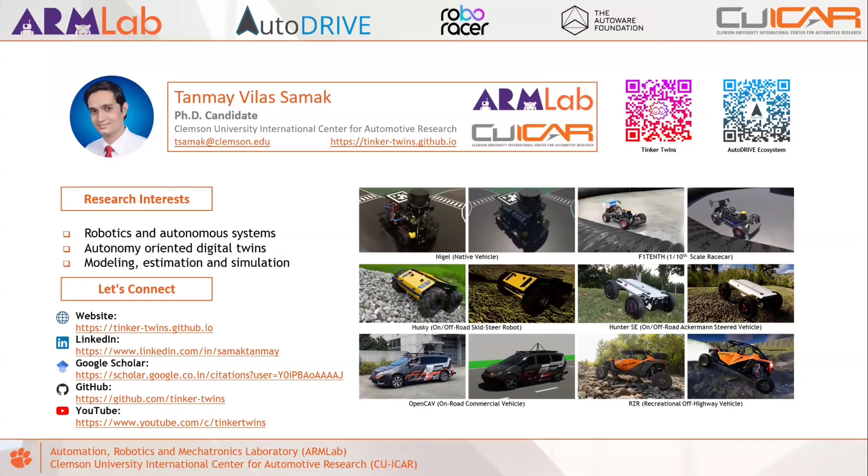Our PhD research is targeting digital twins, no pun intended, where I am focusing on the real-to-sim aspect: whatever is in the real world, how do you model it, estimate it, and then bring it into simulation reliably? Chinmay is working on the other side of the coin, ensuring whatever works in simulation can be transferred with guarantees back to the real world.

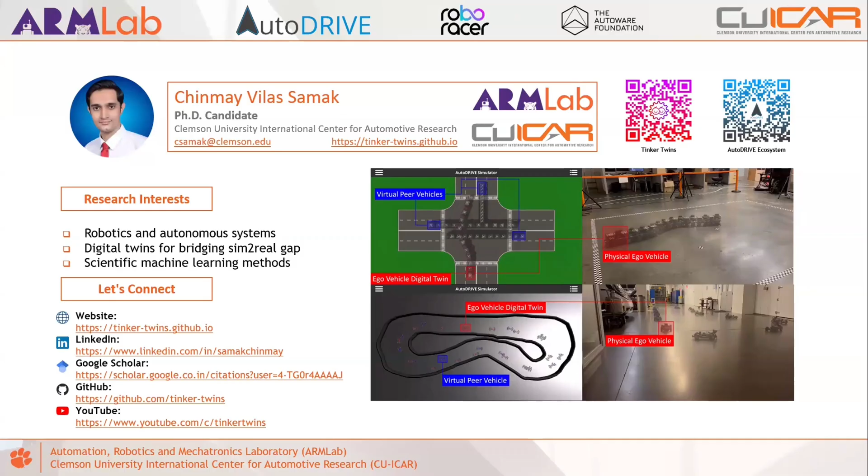In today's agenda, we'll first go over the introduction of what the AutoDrive ecosystem is and how it enables research and education. We'll then talk about some exciting competitions realized by AutoDrive. Most of the talking today will be about AutoDrive-Autoware integration, where we'll highlight some key aspects and demos that we have curated. Followed by that, we'll have a step-by-step tutorial on how you can get started with AutoDrive and Autoware today. And then at the end, we have some exciting unveiling to do, which I won't talk about now, to save the fun for the last.

So let's first get into what the AutoDrive ecosystem is. For those who don't know, we have been developing this digital twinning ecosystem for a few years now. It started as our research internship at Nanyang Technological University, then continued as our senior design project in undergrad, and after we joined directly to pursue our PhD at CUICAR, this is something we have been developing further.

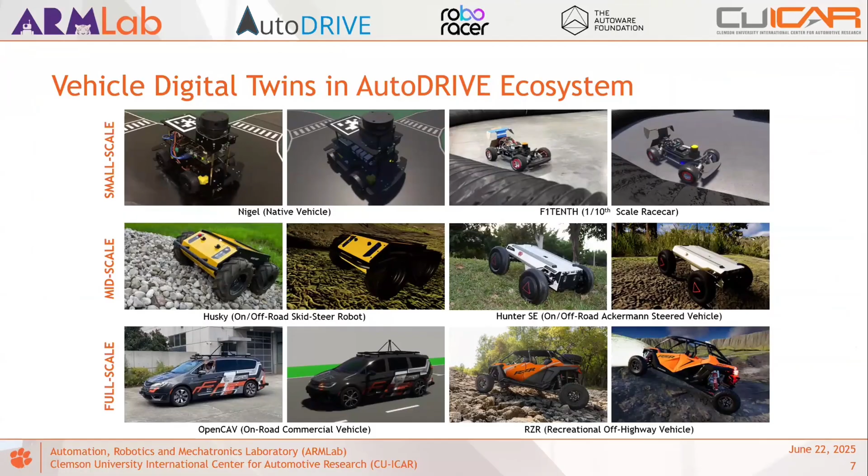So here is a glimpse of, or a zoomed in version of, the different digital twins that AutoDrive supports. And here you can see them in action, where you have the different scales of vehicle dynamics being simulated differently for each vehicle.

For example, small scale vehicles generally have very basic powertrain components, a motor connected by some gears directly to the wheels. But as you go towards full scale vehicles, you have very detailed powertrains. The same applies to other aspects of vehicle dynamics like the suspension geometry and things as such.

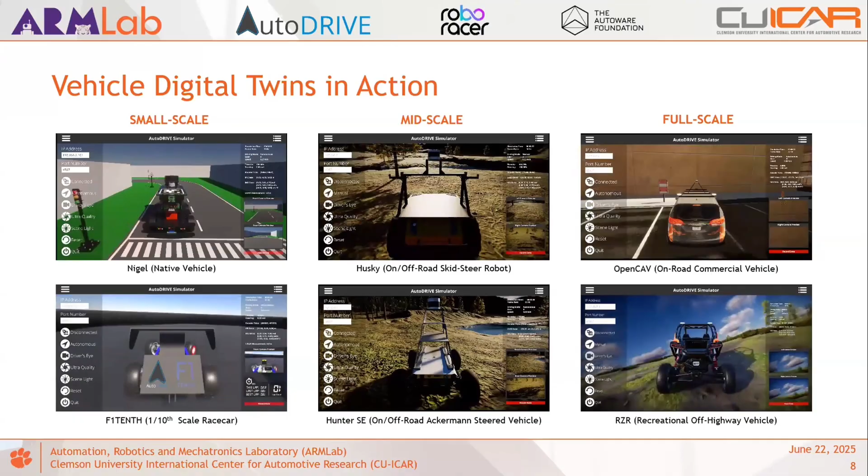Apart from that, the sensor suite also changes. So on the smaller scale vehicles, you have sensors that are typically hobby grade or general purpose academic grade sensors. But as you move to mid scale robots, you now have a mix of both hobby grade sensors as well as industry grade sensors. Typically, when you translate to full scale vehicles, you now have the complete sensor suite comprised of industrial grade components. And these now have been replicated to the digital twins so that the development of algorithms can be targeted accordingly.

Coming to environment digital twins, again, here is a zoomed in version of the different environments that I just discussed. So we have different synthetically constructed environments for small scale vehicles, typically like boxes or vinyl stickers, or in the case of F1TENTH or RoboRacer racetracks, the air ducts.

One of the environments, the tiny town, is something that we have kept for benchmarking across different scales. It is basically the scaled up or down version of the same environment across the different scales that you see. Apart from that, you have different mid-scale as well as full-scale environments. Full-scale environments are typically more diverse in terms of their features so that users can target different styles of autonomous driving or different applications of autonomous driving in general.

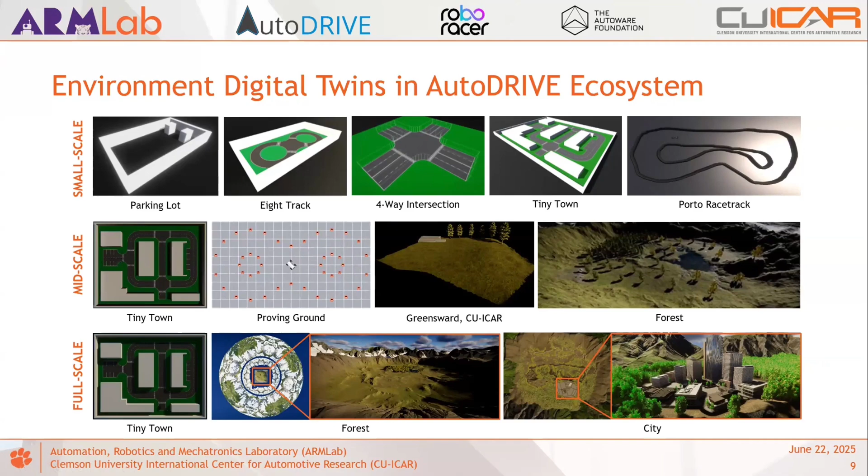But static environments are themselves not enough. So we have, of course, the option of introducing variability in terms of dynamically changing the times of the day, the weather conditions, or other aspects of the scenario.

What you see on the right video is basically a test matrix that procedurally generates and simulates different times of the day. So the top two rows here are going from dawn to dusk to midnight. And the bottom two rows are showing the different procedurally generated weather effects, from clear skies to overcast, foggy weather, rain, as well as snowfall.

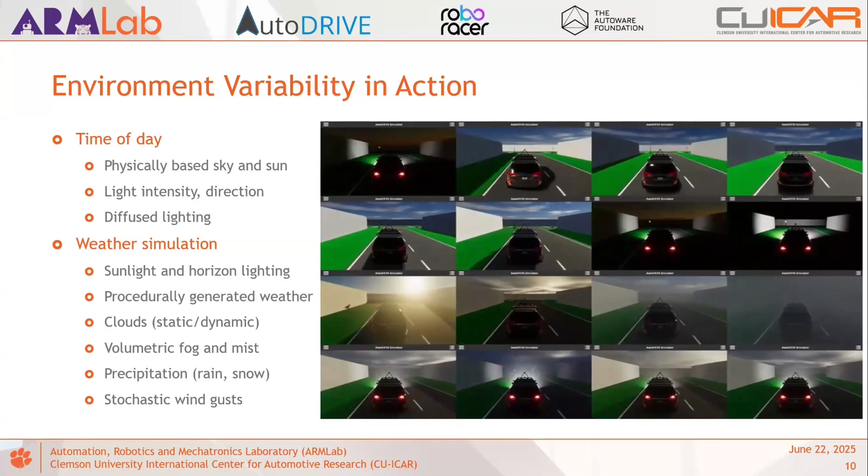But simulating alone is not sufficient. So you, of course, have the most critical aspect of connecting the digital twin ecosystem with a development framework. And that's what the APIs and HMIs are for.

APIs are typically targeted towards autonomous driving applications, where, as you see, we have a different suite of APIs that we support. These will be primarily used for developing the autonomous driving algorithms and interfacing them in real time with the simulator. HMIs are primarily targeted for human in the loop testing and development.

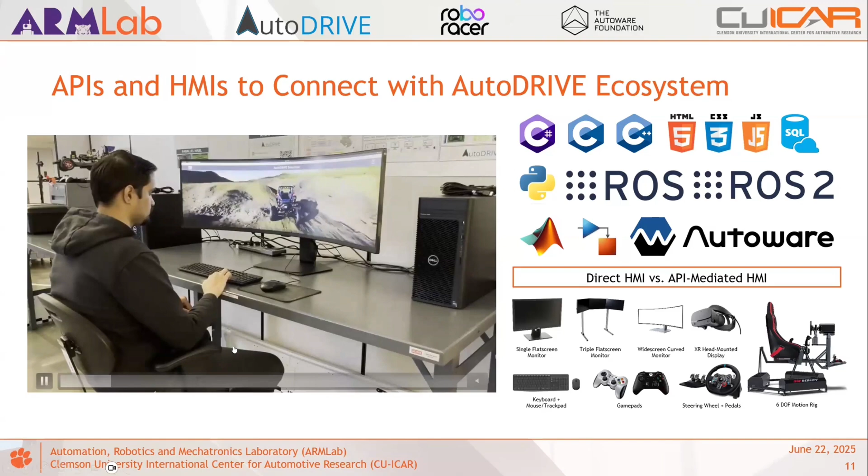And this can be now mixed and matched as well, so as to create a mix of autonomous driving and manually driving aided scenarios, where you have mixed traffic participants, enabling research or development in those operational design domains.

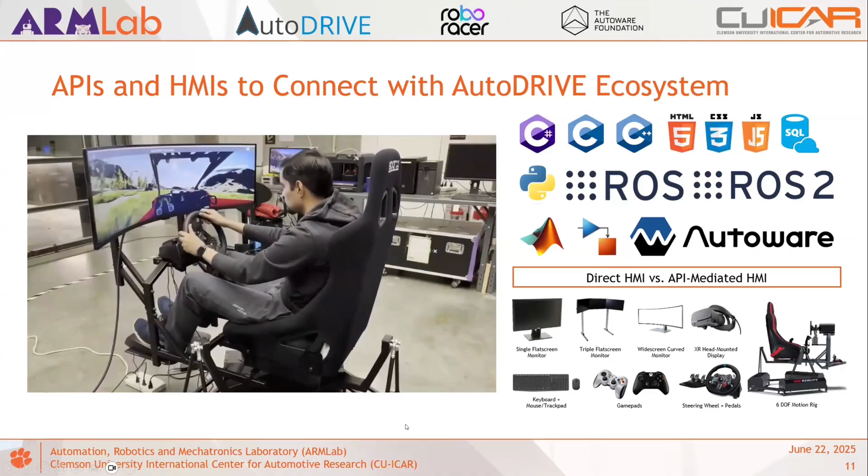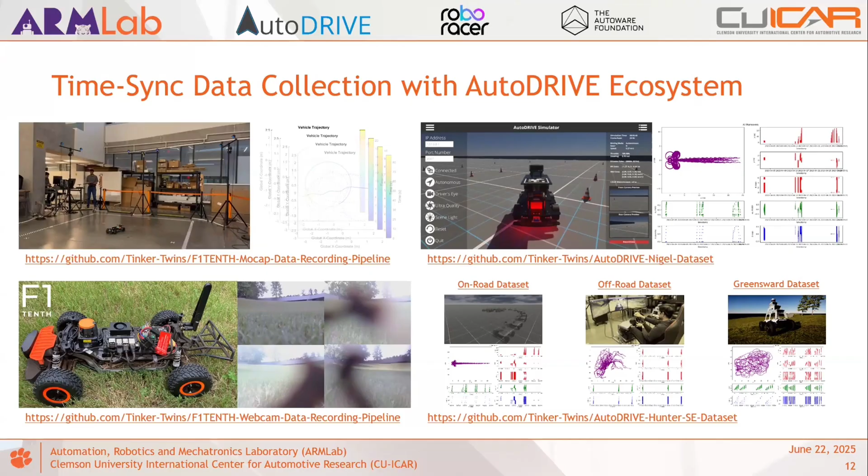Apart from that, we have also released a few data sets using the AutoDrive ecosystem. These are both from the real world as well as the digital twin of the same vehicles. The one thing I would like to highlight here is that all of these have been time synchronized from a data generation perspective, so that not only perception data, but the dynamics data of the vehicles is also usable, and could lead to, say, for example, deriving surrogate models for different motion planning applications or even control synthesis.

One of the key aspects of digital twins is being able to accelerate them, and that's what is supported through the HPC ready simulation infrastructure, where we have different ways of parallelization.

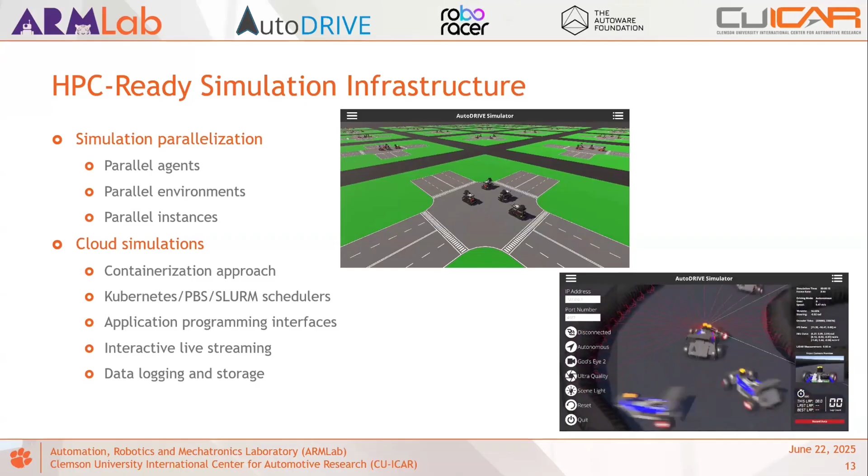Some of them are, as you see, agent parallelization and environment parallelization, where, for example, you could parallelize different environments or agents and isolate them from each other, and then scale those deployments. But apart from that, you also have instance parallelization, where you could spawn multiple instances of the simulation itself, which typically isolates the different variables and vehicle dynamics aspects.

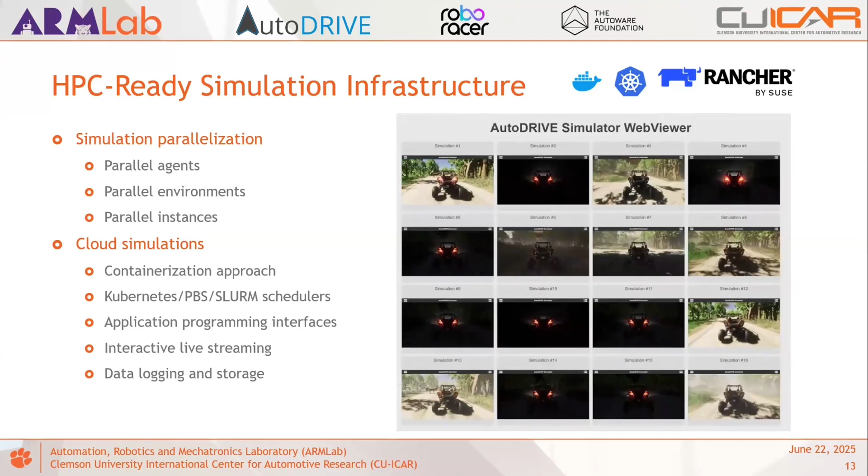These could be done in different ways. Here, for example, we have one of the works where we used Docker containers and Kubernetes orchestration using the Rancher cluster to orchestrate parallelized simulation workloads within cloud infrastructure. Here is another representative use case where instead of using Rancher, we adopted our university's Palmetto cluster.

Coming back to digital twins, here we are showing how one could use the AutoDrive ecosystem to immerse physical full-scale vehicles in the loop with their digital twins, and support different scales of immersion of the physical vehicle within the digital space. So here you have, for example, pure simulation, which simulates the digital twin.

It interfaces with autonomous driving software stacks, where the simulator, typically represented by this block, simulates vehicle dynamics, sensors, as well as the virtual environments. And the real-time data is interfaced with the autonomous driving software stack.

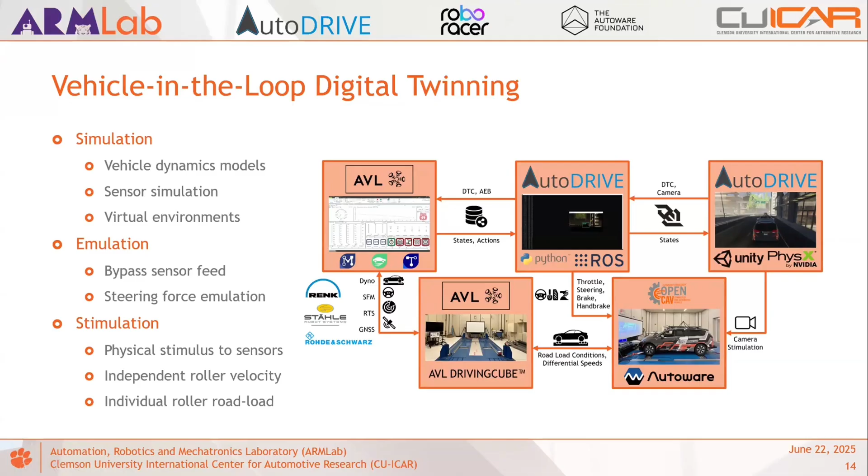You can control the independent roller velocities and road loads to emulate different dynamical regimes of operation for the physical vehicle. These are then fed back as a digital thread into the digital space, and this loop continues to make sure that the physical and digital assets are in sync throughout the experiment.

So here is a quick glimpse of how it looks. Again, to reiterate, we have the projectors mounted on the windshield of the vehicle, projecting live feed from the digital space in front of the vehicle.

The physical cameras on board the vehicle are capturing the projected feed, making the vehicle, or the autonomous driving algorithm, think as if it's immersed in the digital space.

The physical vehicle is then controlled using the autonomous driving software stack running on board. Here, for example, we are using Autoware as the validation stack for our experiments, running a test case of autonomous emergency braking.

The physical control commands are being relayed in the real world, and the chassis dyno makes measurements to feed and close the loop with the digital twin of the vehicle, updating the vehicle dynamics within the simulation space. That closes the loop to update the projection feed in front of the vehicle.

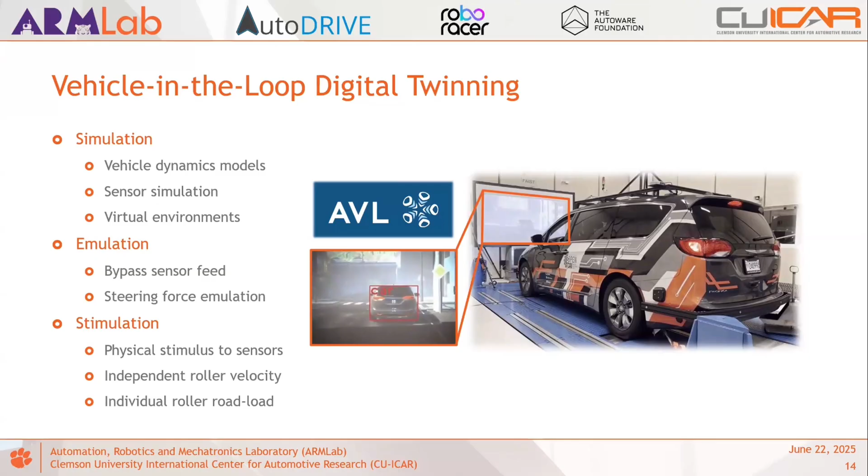But this is just single agent vehicle-in-the-loop digital twinning. You can now also explore interesting use cases from a multi-agent digital twinning perspective, not just pure digital twinning but mixed reality digital twinning, where what you see here is only one physical vehicle running in the environment.

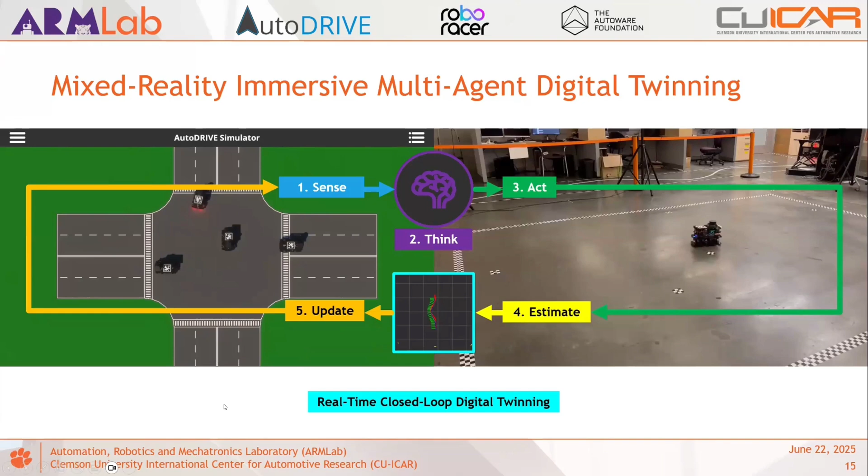Compared to three peer agents and a virtual scenario set up within the digital space that now synchronously performs a multi-agent intersection traversal task. And you can, of course, scale these across different ODDs and operational scales.

For example, the matrix you see here - the first row represents the test bed, which is the real world. You can have one or more vehicles in the real world, depending on the use case.

The state estimation from these is done using the dev kit, where, for example, you have onboard state estimation algorithms for small scale vehicles, such as LiDAR based range flow odometry, inertial encoder odometry, as well as full-scale 3D point cloud based localization, estimating different states of the vehicle.

These states are then updated within the digital space to synchronize their digital twins within the virtual environments. You have, for example, three different use cases - first, intersection traversal, where you have three other agents co-participating within the same virtual environment.

You have an autonomous racing use case, where a digital entity of a roboracer vehicle that's completely virtual is immersed in the loop with the physical vehicle you see above.

And finally, for OpenCAV, you have a jump scare scenario where a virtual vehicle is cutting in front of it without any warning, and the digital twin has to sense it and then relay the same action commands within the physical space to make sure that the emergency braking is not only happening from perception side, but actually even within the real world, you have the full factorial test plan that now makes sure that the braking distance is safe and optimum. So what this enables is two things.

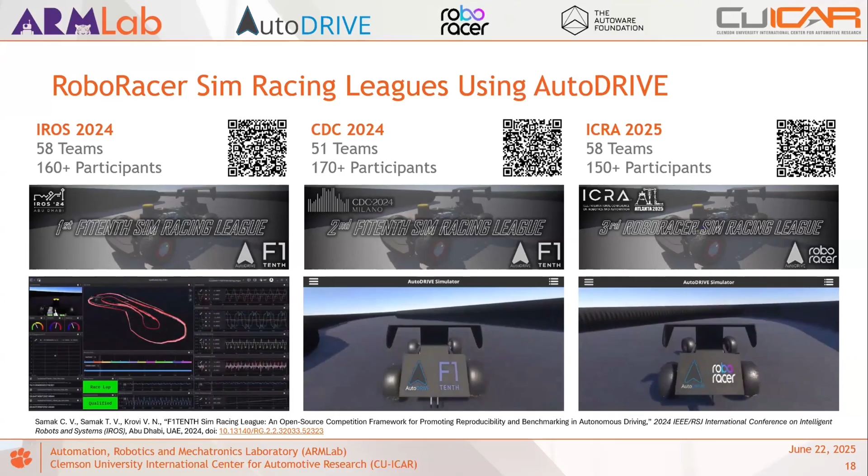We got an overwhelming response with over 50 teams registering for each iteration and over 150 participants. It was really a good experience, not only for us from an organization perspective, but the teams who were using the digital twins for developing their algorithms were now able to also perform zero shot sim to real transition in the physical competition. So the sim racing leagues were typically held a week ahead of the actual conference so that the teams could participate in the sim racing leagues ahead of time and then go to the conference and participate in the physical racing league. And we also saw some really interesting algorithms, as well as the sim to real transition of those aided by the digital twins, win the physical competitions as well.

So here is a typical representation of the participation response that we got. For ICRA 2025, which was the most recent competition held, we saw participation from over 150 people across 58 different teams representing 32 different organizations, at a global scale spanning over 25 countries. So it, in a way, validated the practicality and scalability of the competition deployments.

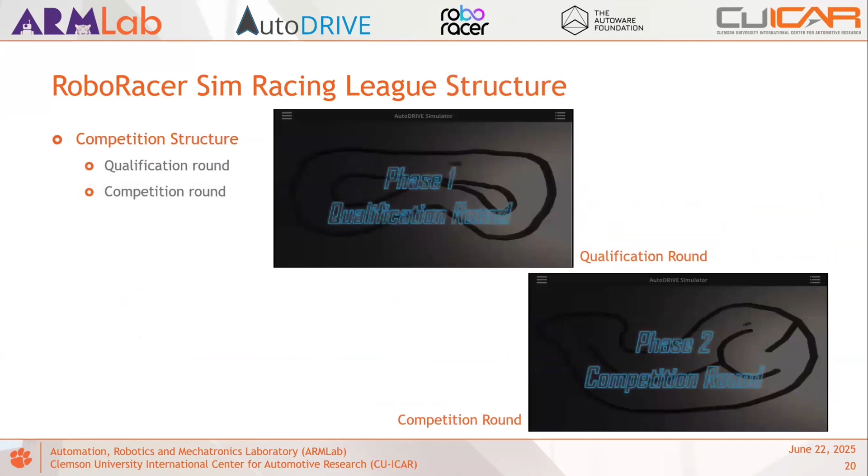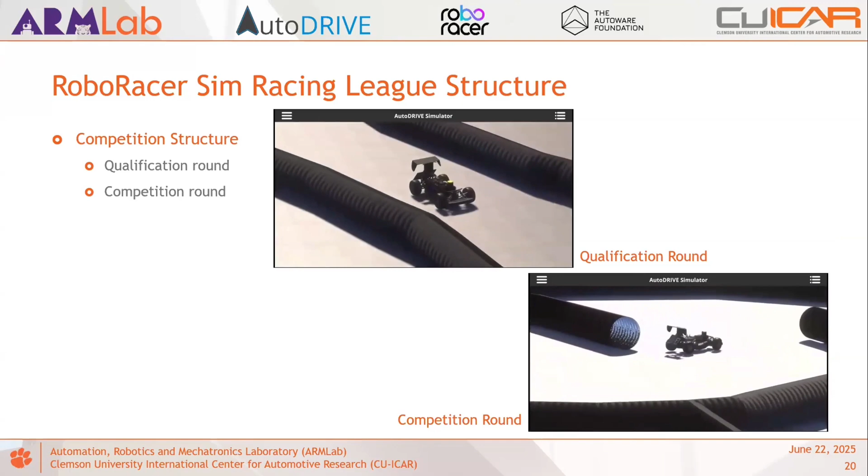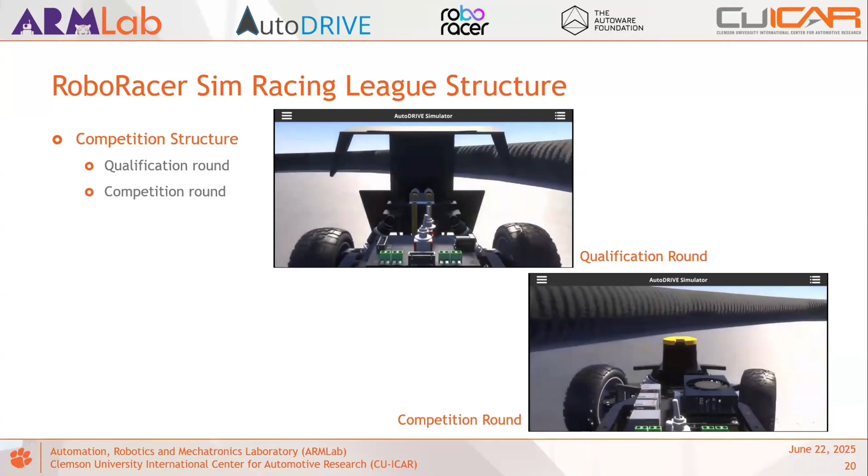But what is more important here is firstly to understand the competition structure, which we believe helped us scale this to such a level. We divided the competition into two different phases. One was the qualification round, wherein we released dockerized environments for the simulator as well as dev kit to all the teams, approximately a month ahead of time. There was a set deadline for all the teams to submit their solutions for autonomous racing, which were then going to be evaluated for their ability to continuously run multiple laps around the track. And the only objective here was to be as safe as possible. So safety was most critical, performance was secondary.

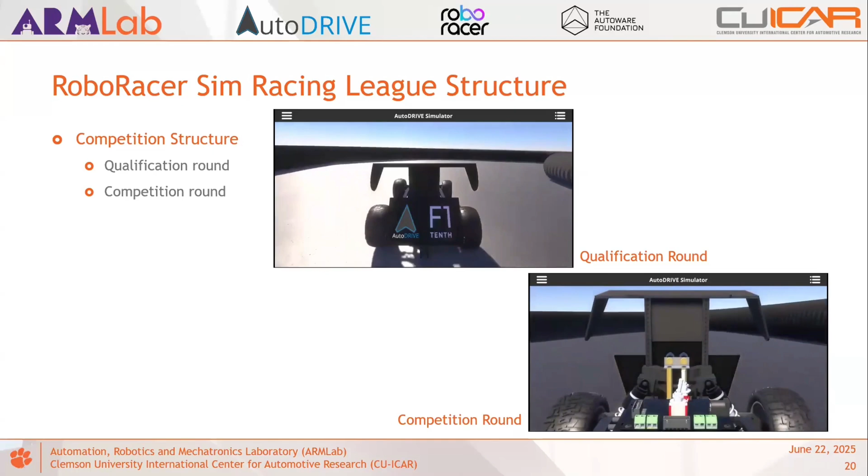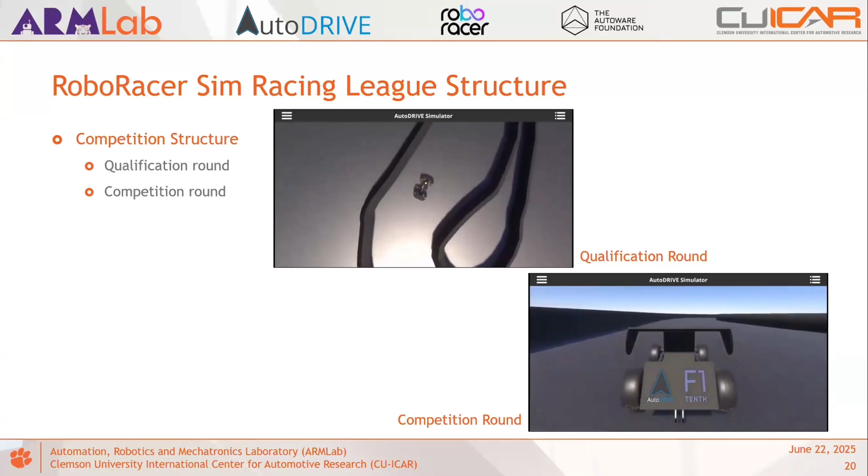But then in the competition round, just a few days ahead of the final deadline, we switched the track with another one, and we expected all the teams to slightly modify their algorithms or tune them for the new racetrack, and their algorithm should have already been robust enough for it to be able to handle track changes and other changes in the environment. So here is how the competition framework looks.

What we essentially have adopted here as a best practice is the option of containerization, in which we offer every team the containerized instance of the simulator as well as dev kit. Their job is to just work on this small aspect of developing their own package or packages that can now interface with the AutoDrive API to communicate back and forth. And the primary modality that we used for deploying these competitions is ROS2, which is directly scalable to the Autoware stack. So some of the teams have also started to use the Autoware stack to develop their autonomous racing algorithms and have performed really well in the competition.

The other aspect in terms of global scaling is to understand that not everyone would have computational resources that are state of the art. So we offered the teams the option of distributed computing, as well as GUI versus headless modes of computing, to better efficiently develop their algorithms, and whatever solutions they could submit were still valid when we deployed them and executed their solutions.

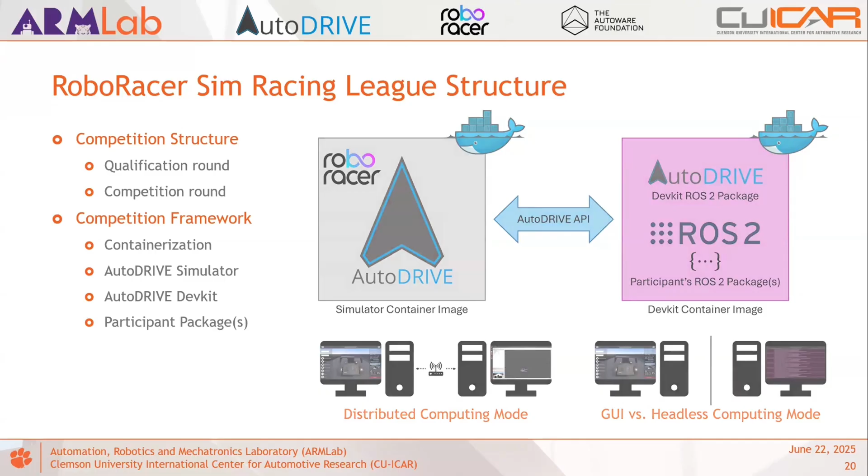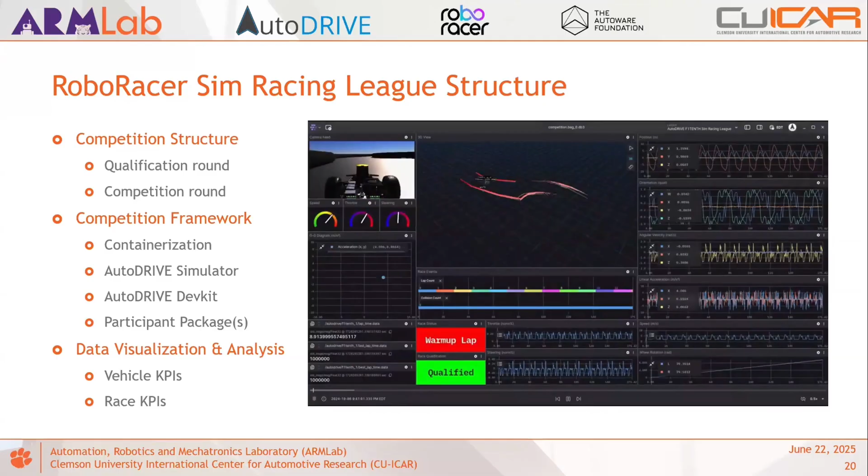The final aspect of this competition was to be able to transparently record all the key performance indicators for the vehicles as well as the race in general and provide this data back to the teams. In addition, we now have the capability to analyze this data, which is pretty detailed in terms of all these different KPIs, as well as comment on the reproducibility and benchmarking aspects of the simulation and testing of different autonomous racing or driving algorithms in general.

So with that introduction and overview of the AutoDrive ecosystem and its applications, let us now move to the specific topic of interest, which is its integration with the Autoware stack.

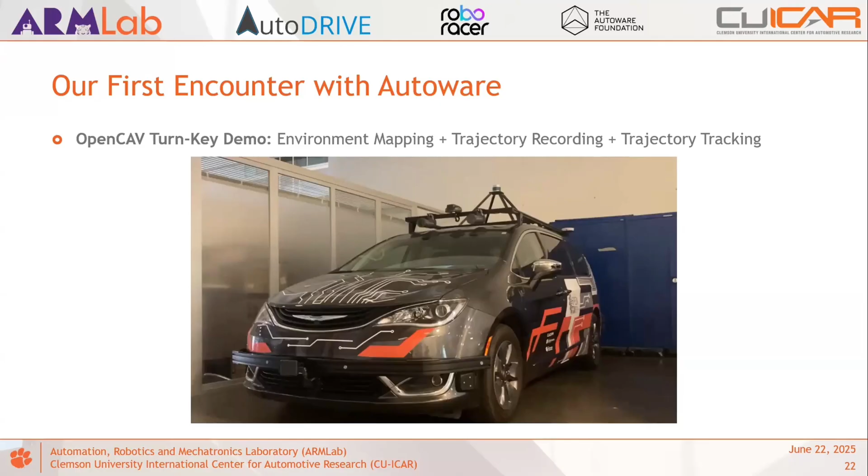The main motivation we had for doing this was our first encounter with the Autoware stack when we started our PhD at Clemson. We encountered this vehicle that is part of our lab, the Open Connected and Automated Vehicle, or OpenCAV. It's basically a Chrysler Pacifica retrofitted with sensors, drive-by-wire, and onboard compute, which can enable autonomous navigation throughout the campus.

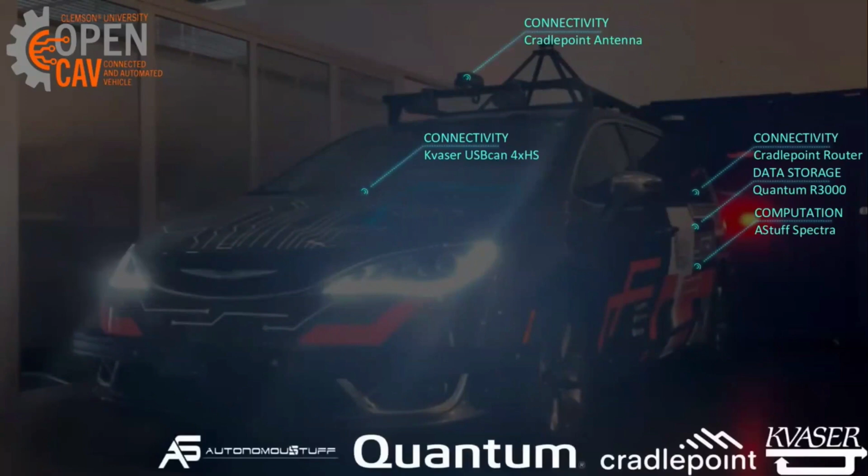We already have a pre-computed map of the campus environment, and we can use that map for localization. Once we have the localization estimates, we can drive this vehicle around from point A to point B in the campus and record that trajectory, or we can also do an online or offline trajectory planning to navigate from one point in campus to the other.

With that plan now, what we can do is offer autonomous shuttle rides for people from one point in the campus to another. So what you see currently in action in the video is the capability of the vehicle running the Autoware stack to map the environment, generate the trajectory, and then track that trajectory in real time, all autonomously, to navigate from one point on the campus to the other.

This is what basically paved the way for starting the development and integration of the Autoware stack with the AutoDrive ecosystem, where, as you already saw, we first had to model the digital twin of the OpenCAV vehicle and then interface it with the Autoware stack, much the same way as the physical vehicle runs the Autoware stack, so that whatever you develop in simulation can be tested rigorously before deploying it onto the physical vehicle.

But most critically, the deployment from simulation to reality should not have any changes, either in terms of the algorithm or even in terms of the interfaces—for example, the topics that the Autoware stack is publishing on, or the sensor streams, or other hardware software integration aspects. That's what was the key motivation, which firstly required a high fidelity digital twin of the OpenCAV, and secondly required the API for AutoDrive and Autoware to be integrated harmoniously so that deployments from simulation to reality became seamless and zero shot.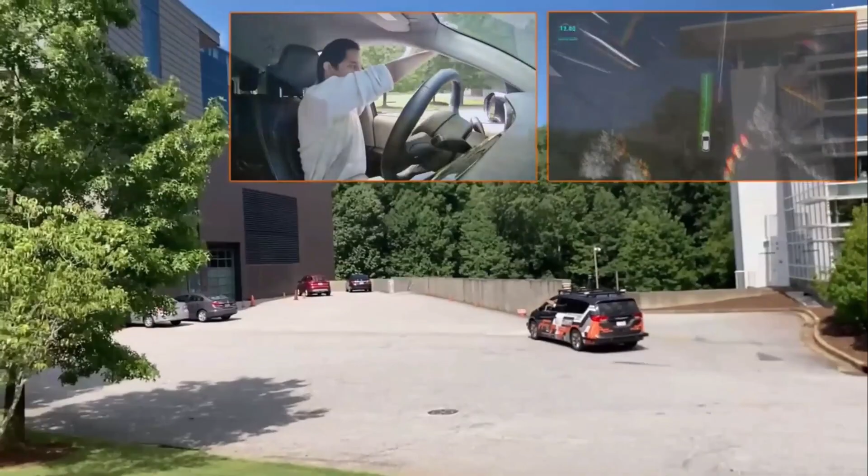Finally, once we had this working for the OpenCAV vehicle, we wanted to have a unified pipeline or framework that can support deployment of a common autonomy stack such as Autoware across all the different scales and operational design domains of autonomous vehicles that we typically encounter during our research. So as a result, with all the different digital twins that we have, we created a corresponding Autoware API for them so that they can be interfaced with the Autoware stack across small, mid, and full scale, while targeting different operational design domains like on-road navigation, autonomous racing, as well as off-road navigation.

So let us now delve into each of these aspects. All the different demos that we will be showcasing hereinafter are going to follow the same three-stage autonomy deployment pipeline, starting with mapping of the environment, then generation of the trajectory, and then finally tracking that trajectory in real time. We will show demonstrations of how we were able to achieve the deployments with the AutoDrive Simulator, followed by deployment in the AutoDrive Testbed, which is the real world.

Just a small highlight for all of these different videos is that these are not just demos—these are in fact fully recorded tutorials that we have released, and we will talk about that in greater detail. With respect to the F1TENTH vehicle, or the RoboRacer vehicle, here we completed the first stage of environment mapping.

Next stage is recording the trajectory. So we have the map-based localization estimates engaged, and what we are able to do now is just drive around the racetrack to collect the waypoints, which will serve as our reference trajectory. Now this can be done either manually, such as the demo currently showing, or it could also be employed for map-based raceline optimization.

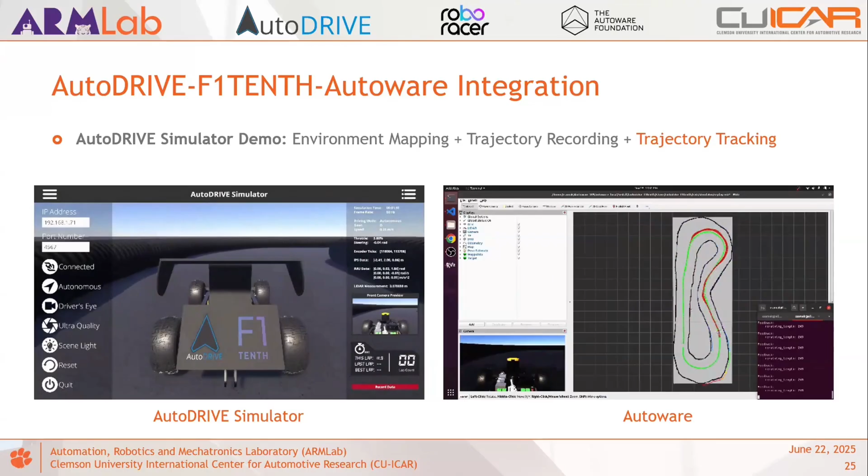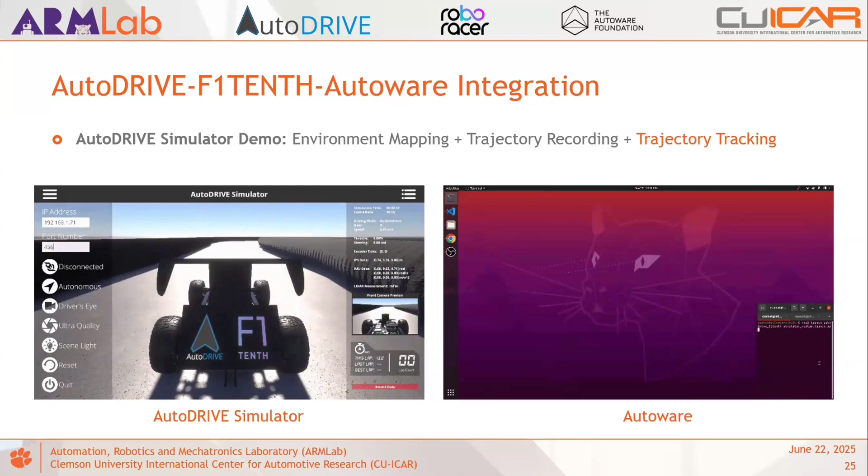We need a continuous way of completing multiple laps around the racetrack. So what we need to do is keep track of our pose estimate and not just stop at the endpoint of the trajectory, but also try to complete an entire loop multiple times, which is required, for example, in a time attack race where you have multiple flying laps to register the fastest speed.

With that deployment in the simulation, we also evaluated it in the real world. Now, again, to highlight, this is a zero-shot sim-to-real transfer, meaning we have not changed or tuned any perception parameters, like, for example, the LiDAR covariance matrices or any other aspects of the localization algorithm. And we have not even tuned any of the control parameters like the vehicle control commands or controller gains.

All of the things that you see are being transferred zero shot with the same parameters that they were simulated in. One more thing that you can observe here is that we have a completely different track between simulation and real world, but the pipeline still works. It is working in the real world without any modifications to the parameters.

So again, the second step was that of recording the trajectory. And finally, here we have the pre-recorded trajectory being loaded, the vehicle being localized within the map, and then driving autonomously using the Autoware stack.

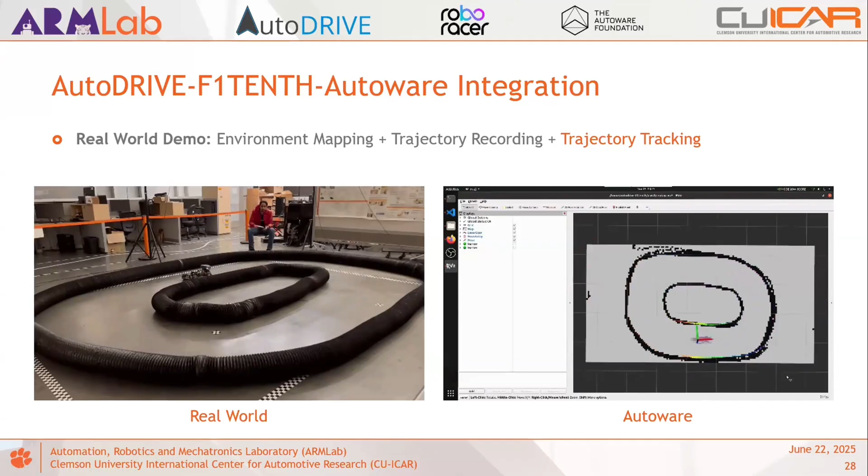One more small thing here is everything's running on board the physical vehicle. So in the simulator, of course, you can use a high-end PC to deploy your stack and the simulator on. But the idea is that all of these software stacks should be edge deployable, and that's what you see on the physical vehicle, where we are using the onboard computer for the RoboRacer to deploy the Autoware stack.

Now coming to the second vehicle, which is Nigel. Here we devised a slightly different example because the operational design domain that this vehicle targets is that of on-road autonomous navigation. So first of all, what we are doing is just exploring the environment and creating a map out of it, which will then be used for the trajectory generation, localization, and motion control task.

Once we have the map, we can move forward with trajectory recording. And here what we are essentially doing is recording the localization estimates of the vehicle and driving it from the spawn location to one of the designated parking lots. So this application is essentially demonstrating an autonomous parking application.

And once we have that plan, either via a pre-recorded example or by a motion planning strategy, we can then engage the vehicle in autonomous mode to navigate from the spawn location all the way up to the designated parking lot.

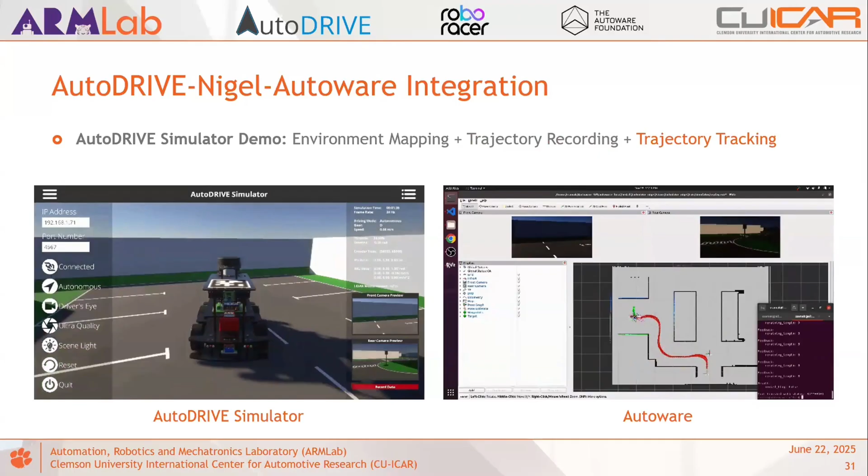And similarly, as with the RoboRacer vehicle, we were exactly able to deploy this in the real world, zero shot, without modifying any perception or control parameters. So here, for example, you see the real world mapping in action, followed by recording the trajectory from the spawn point to the designated parking lot.

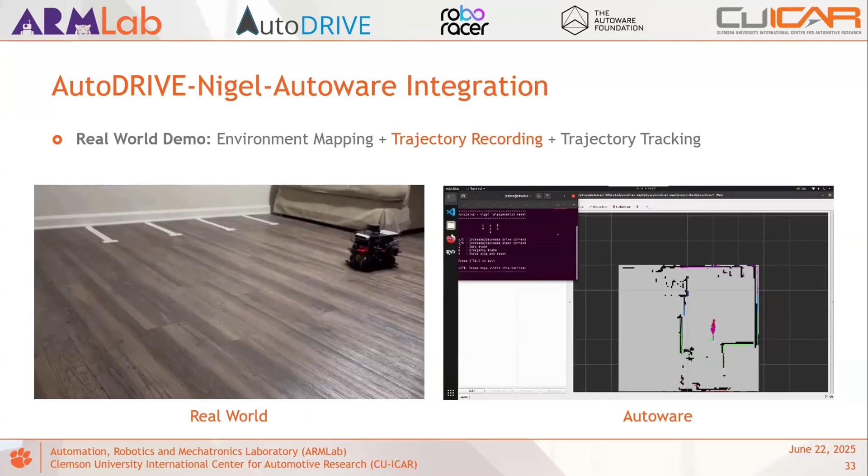And then finally asking the vehicle to do the same autonomously in real time using the Autoware stack that's deployed on the physical vehicle.

So these were some of the small scale deployments. Next, we move to mid-scale vehicles, for example the Hunter SE by AgileX.

Here again we are mapping the environment, but this time using a different approach. As you see in the simulation, we have a 3D LiDAR mounted on the robot, but we are using only a 2D slice of the 3D point cloud to create a 2D occupancy grid map. The reason we are doing this was to analyze the effect of environment representation in terms of mapping.

Since you have a simplistic environment which can typically be captured in a 2D plane representation, such as the 2D occupancy grid map, we wanted to see if that was enough for the vehicle to be navigated from point A to point B and park autonomously, similar to Nigel which you saw earlier, or was it truly necessary to have a 3D map. Turns out you typically don't need a 3D map unless the environment is very complex with objects that are either lower or higher than the 2D slice you are capturing.

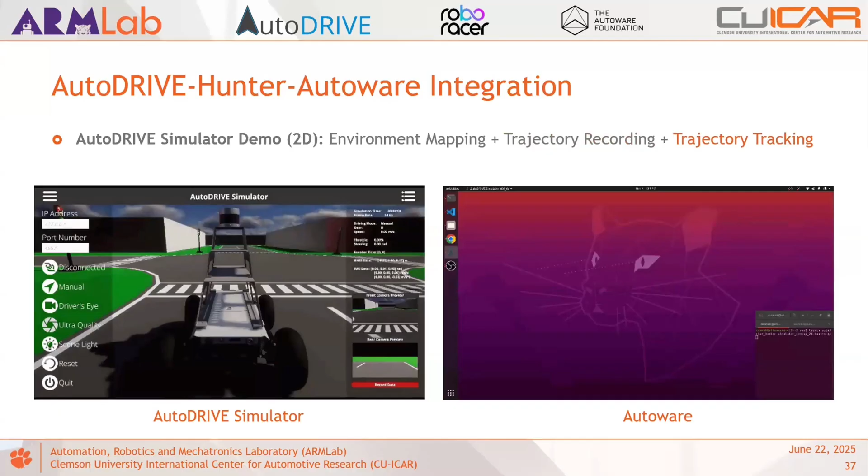So here with the 2D map, we are now localizing the vehicle and driving it from the spawn to the targeted parking lot, while recording the trajectory so that the autonomous driving algorithm can now move the vehicle much the same way from the spawn point to the designated parking area, but autonomously using the Autoware stack.

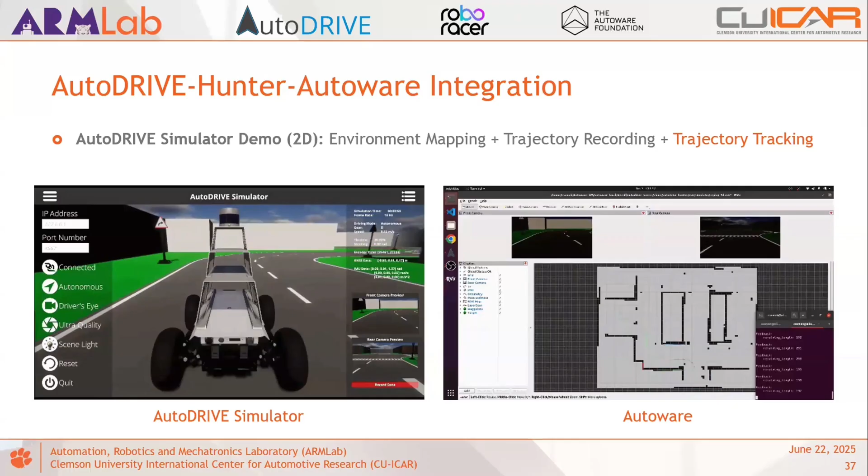And once we have this working in simulation, we could transfer this similarly to the real world. But what's more interesting is to deploy this in much more complex ODD, such as off-road driving. That's what we typically explored in this use case, where you have a very detailed off-road environment full of ridges, trees, even a pond in the center of the map.

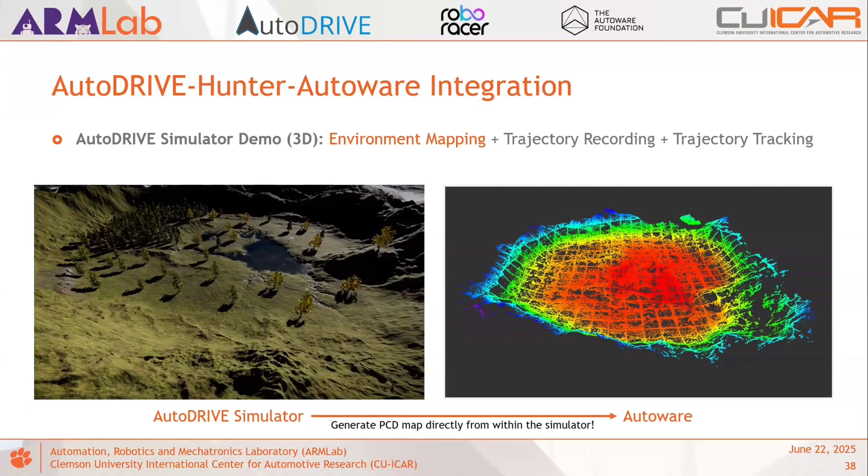We use AutoDrive Simulator to directly create a point cloud map from the ground truth sensor simulation within the simulator. Of course, you can use the Autoware stack to do the same, but here we are just demonstrating one of the advantages of digital twins. What you can do is directly start from the trajectory recording phase rather than investing your time in mapping. As long as you know that the digital twin you have is a true representation of the physical deployment you have in mind, this should work out of the box.

And here you can see the trajectory recording in action, where we are teleoperating the vehicle from the spawn location to a designated point in the environment, which if traversed linearly would go through the pond.

And finally, we are then asking the Autoware stack to try to navigate the off-road environment autonomously. This is basically expanding the operational design domain of the Autoware stack, which has been pretty much explored in on-road driving conditions, to off-road now, to enable off-road navigation in an end-to-end setting, in a simple cutesy example or demo that you are seeing.

And of course this can now be complexified in terms of both the environment or the vehicle, but more importantly also leveraging other aspects of the Autoware stack, the different object detection, localization, or control methods that Autoware offers, to come up with more and more efficient means of traversing the off-road operational design domain.

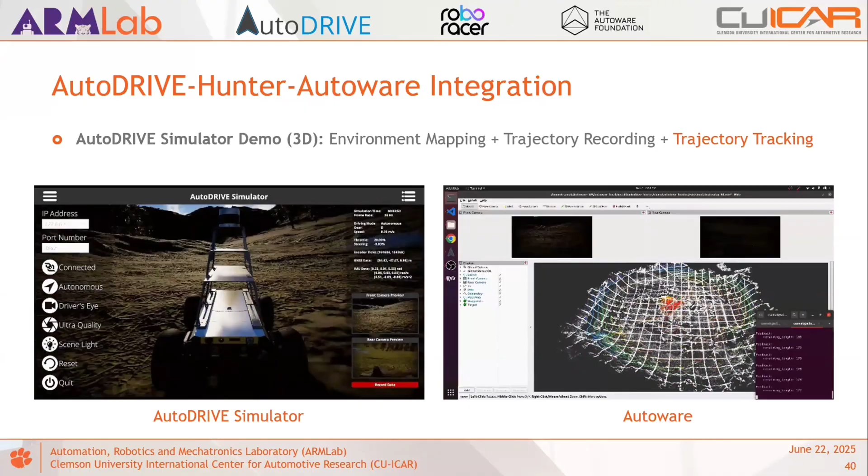Finally, going full scale, we have the OpenCAV that we started with, being simulated in the same benchmark tiny town environment. Here again, we are analyzing the effect of 3D versus 2D perception.

So here we are using the 3D LiDAR, but creating a 2D occupancy grid map of the environment from the thin slice of the point cloud. As you can see, as we scale the deployments and inject sensor noises that are realistically sampled from real world data, we can start seeing different variations in terms of mapping. For example, the smaller scale vehicles would have different resolutions of the map compared to the full scale vehicles.

And storing those maps now becomes difficult. If you keep using the same resolution, the scale of a full scale environment will typically limit the storage size of the map, or even onboard computation if that's happening in real time to create the map in the first place. That is something you have to be mindful of while devising your algorithms. So changing the resolution, changing the scale of the map becomes important.

Next, you have the same way of generating the trajectory from point A to point B. Again, because OpenCAV is representing an on-road commercial vehicle, we are targeting the autonomous parking operational design domain, where the vehicle is taken from its spawn location to a designated parking spot, and then asking the Autoware stack to do this autonomously using the 2D map in this case.

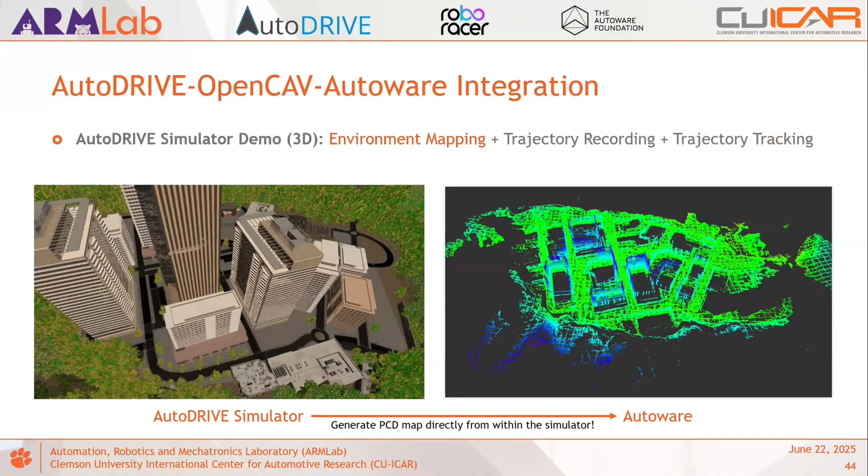Both in the case of the 2D navigation example we just showed, as well as the more realistic demonstration of the same application in a downtown-like scenario, we start off with constructing a 3D representation of the point cloud data and use that for recording the trajectory based on the localization estimates of the vehicle.

It is now starting to become a bit noisy because of the complicated representation of the environment. Even the roads here are not completely flat, so it brings in the powertrain dynamics of the vehicle, where you have transmission upshifts and downshifts depending on the gradient of the road.

And that plays a crucial importance in terms of ensuring whether your algorithms can be scaled to the real world or not, because the physical vehicle would have those effects in reality.

Finally, here as well, you are seeing the Autoware stack completely controlling the digital twin of OpenCAV fully autonomously, taking it from the spawn location and driving it all the way across the road, across the intersection, and then into the parking space, parking it autonomously within the designated parking lot.

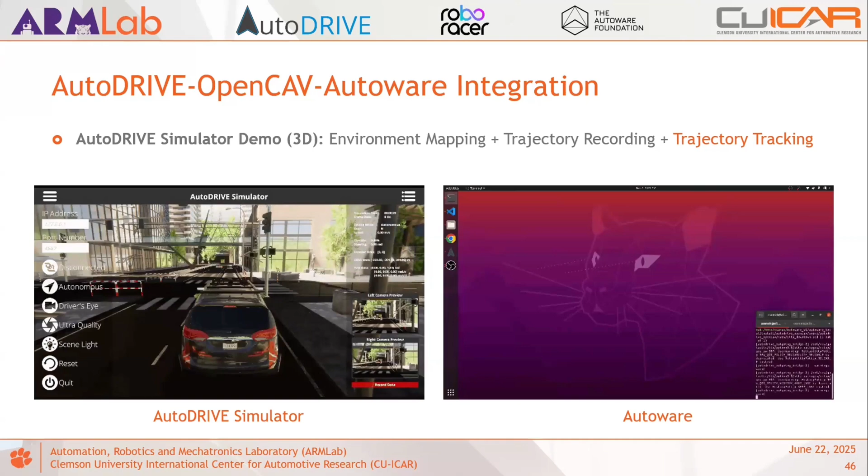And finally, as we demonstrated earlier, the algorithms that have been developed or fine-tuned in simulation or with respect to the digital twins alone can be deployed into the real world directly, using a mixed reality digital twin interface, or even with vehicle-in-the-loop setups such as the AVL driving cube.

All the different examples we showed earlier have all been open sourced, and we have a dedicated GitHub repository as well as a complete YouTube playlist that guides step by step through all these different examples as well as the general interface of AutoDrive with respect to Autoware.

For example, the first video here demonstrates the high level interface of the repository with documentation for each and every vehicle and instructions for deploying this either with the digital twin or in the real world.

And the second video is an example of one single vehicle, in this case OpenCAV, to demonstrate the documentation of the entire example and workflow that one can follow to recreate or replicate the results.

But the map-based autonomous navigation examples we just showed across the different scales or ODDs is just the beginning, and this integration can enable more complicated approaches to be deployed with AutoDrive and Autoware.

And we hope that this stepping stone serves as a starting point for us to now explore some of these challenging problems in the space of autonomous driving or racing.

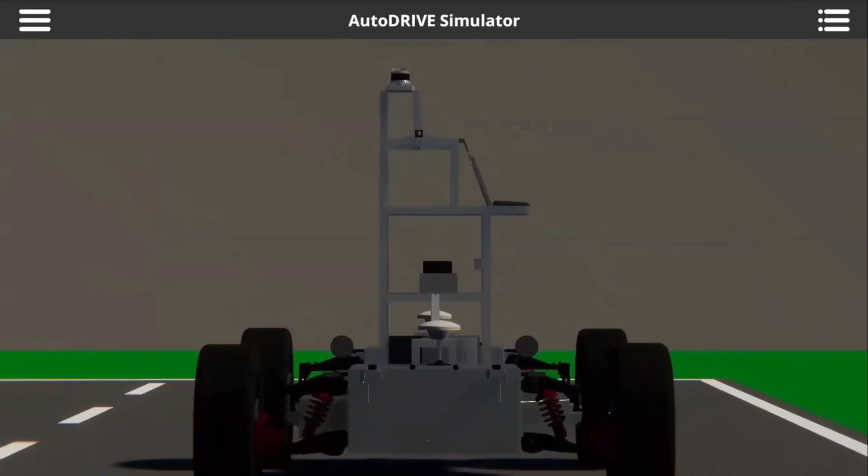So here you have a complete digital representation of the PixKit, which is calibrated from the real PixKit that we have in our lab, both in terms of its high fidelity vehicle dynamics and sensor physics that you see in action,

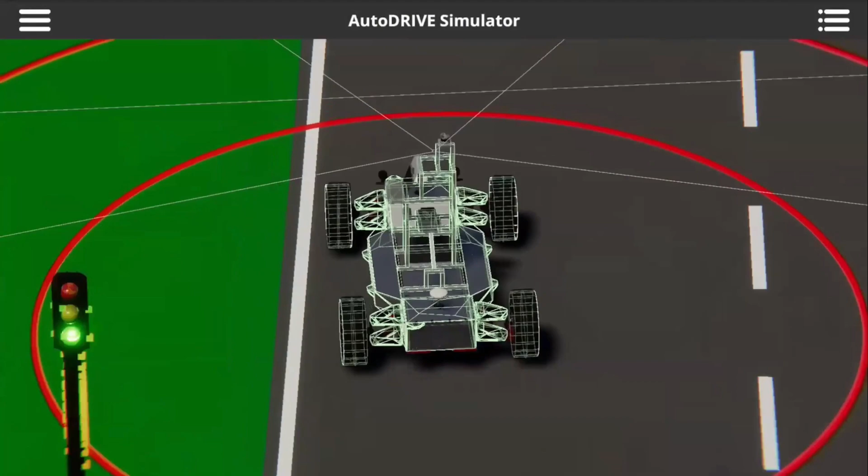as well as the different interfaces and data that comes in and out of the vehicle. Here, for example, you have the same steering mechanisms that the physical PixKit has.

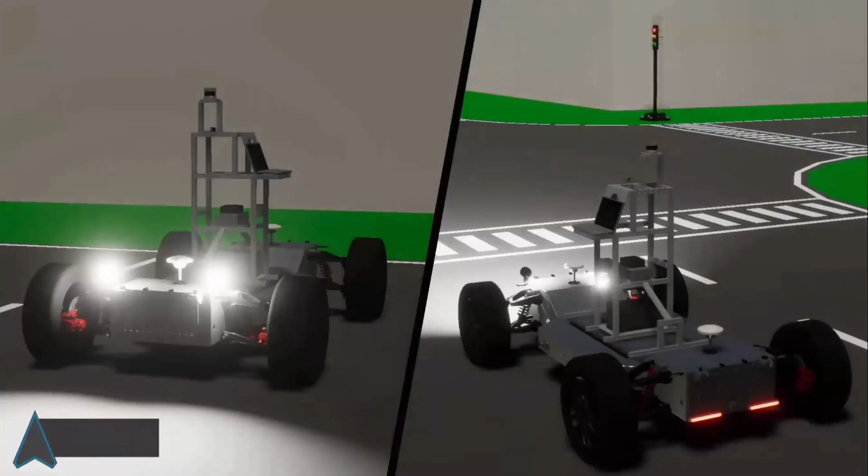So one could now start developing the planning and control strategies for such different skateboard chassis architectures. You also have different lights and indicators being simulated, which Autoware stack is fully compatible with, and this can be useful not only for developing autonomous driving algorithms, but also for signaling smartly to other traffic participants, including humans or other autonomous vehicles, to relay the intentions of the ego vehicle.

Finally, here is just a glimpse of the digital twin in action, where we are driving it across the tiny town benchmark environment. But again, this is just the beginning, and you could put the same PixKit in any other environment. You could even recreate it using real world data. We have pipelines to recreate physical environments pretty quickly, which can enable you to virtually prototype your algorithms for the task at hand.